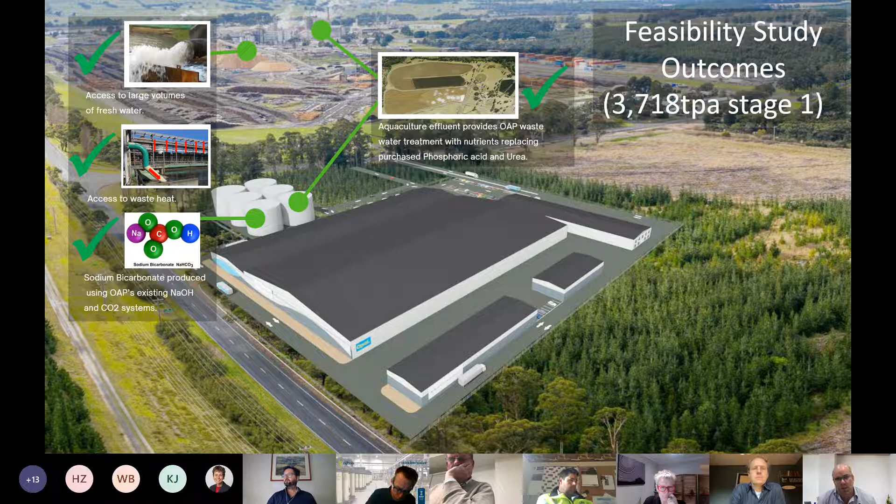Our plan for the future is to grow much bigger. With stage two, our production goes up to 11,000 tonnes a year. The plan behind that was to have the economies of scale to produce our own fish feed. There's a lot going on in the Netherlands with black soldier flies, and in Europe with wood waste used to produce single cell protein for salmon and tilapia food. There are opportunities for us locally to start producing our own fish food once we get the economies of scale.

However, as we grow bigger, the water requirement becomes a lot bigger, and the nutrient load for our effluent treatment facility becomes too much. So we would have to change our current processes, but the best way to remove those nutrients is so that we can then use the water to produce pulp and paper. The concept is we use the water to grow the fish first, then remove the nutrients so we can produce our pulp and paper.

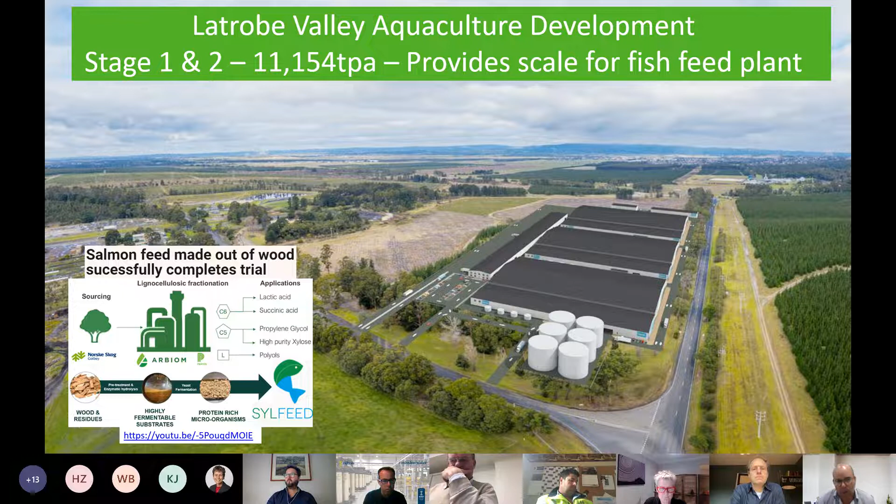So one of the ways this is currently being used in Australia, I'll just play this for you.

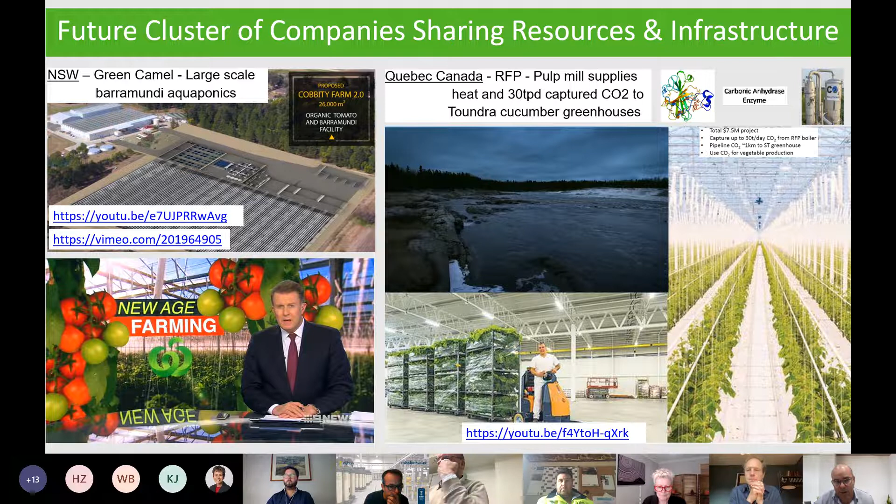However, we would need to follow that with a polishing stage, because the liquid effluent leaving the greenhouses would still be quite high in nutrients. This is also in Australia, in Queensland - large-scale industrial algae production aligned with aquaculture effluent. There's a huge opportunity in Australia to start producing more algae products.

I'm not going to go into that today, but our overall concept is about this: we have this large allocation of water at the moment that we just use to produce pulp and paper. In the future, we'll have our own manufacturing ecosystem where we grow our fish in the water first, then produce our vegetables or berries, then our algae products, and these processes clean up our water so we can then use it to produce pulp and paper. So we're essentially producing 4 products as opposed to currently just 1.

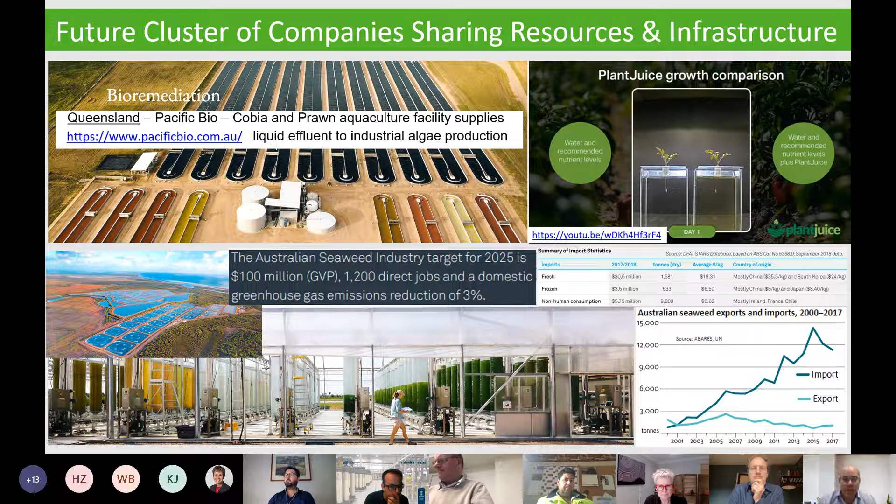Thank you. Under 8 minutes, I hope.

Greg, it's a really inspiring way of thinking and acting. It's brilliant how you combine the problem of the first process as the solution for the second, and the other way around. It's really clever. Thanks for this presentation.

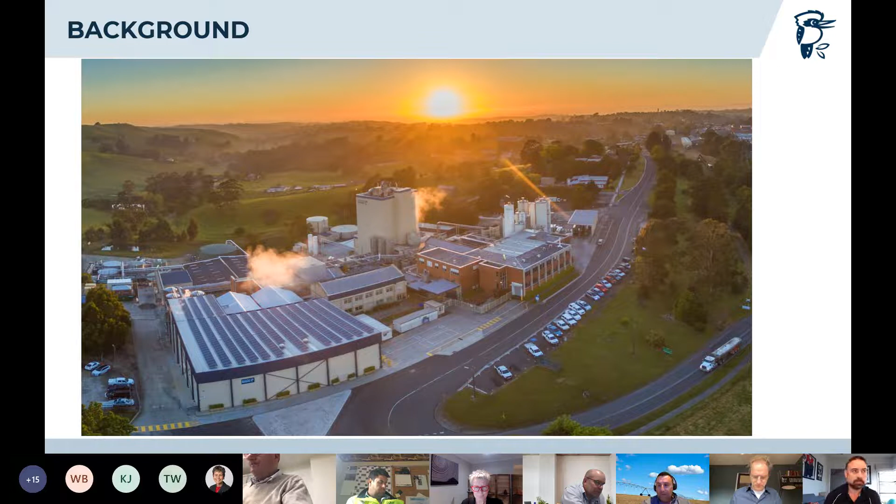There are two parts to our business. On the on-farm side, we don't actually run dairy farms ourselves, but we collect milk from about 200 milk supply partners. Typically about 30% of our supply partners have some form of decent irrigation on their property. All of our dairy farmers will have wash-down water from the dairies or from the yards where the cows come up, or from feed pads. It's very much a pasture-based system down here in Gippsland. All of that effluent runs into an effluent pond, which is necessary and a requirement of dairy farms here.

As I said, about 30% would irrigate that. Because we have a pretty high rainfall area in Gippsland, it's usually only in summer and autumn that irrigation would occur. Some farmers have enough dilution to irrigate directly, some will have to dilute. Particularly with fertilizer prices skyrocketing, they've tripled in the last month on the back of the Russia-Ukraine crisis, and no doubt the same in Holland and other parts of Europe, it's becoming quite an economical way of getting nutrients back onto the soil to help pasture growth. So that's pretty common with most of our dairy farmers.

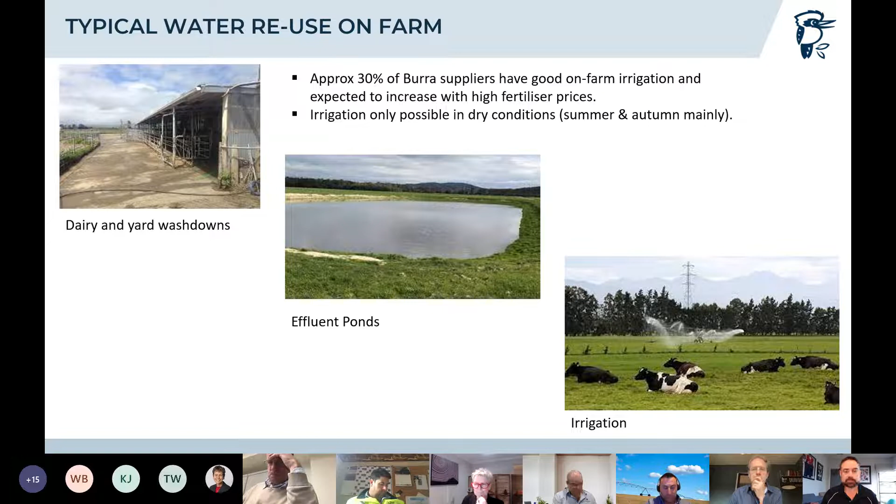Some of the outputs from all of the processes, largely our milk evaporators and dryer evaporators, and we've got a number of membrane plants across the site. We typically have milk condensate. We have cooling water from a lot of our pumps and motors. When we do our infant formula, which we call nutritionals, we need very high quality water, so we go through a cleansing system, taking the bad side of the membranes, if you like, for further treatment.

We generate liquid waste through our cleaning processes, and we end up with wastewater that's usually quite salty because it's been using cleaning chemicals, typically caustic. We do have a recovery system in place — we've reduced our consumption of caustic by around 70% through it. But we still end up with quite a large salty waste stream, which goes down to a municipal treatment facility. The rest of the outputs end up as inputs where we have an RO plant where we concentrate the water, and we use this as a reuse facility.

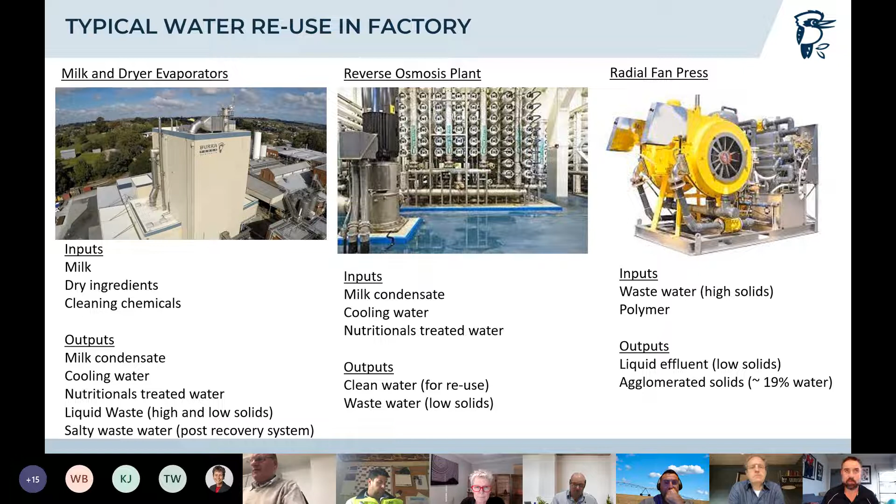Just to give you some numbers around that, we process between 700,000 and 1.5 million litres of milk a day, very seasonally dependent, based on the pasture system that we run for our dairying down in Gippsland here. We still purchase around about 1,000 megalitres a year of town water and recover about 800 megalitres.

We could invest in further filtration plant to do that. We just haven't found it economically viable to do so just yet, particularly now that we've got a larger guaranteed supply, because our inbound water, we call it town water, is linked now to a metropolitan system.

We produce around 30 tonnes a week of agglomerated solids, which goes off for that eventual composting. And our liquid effluent is somewhere in the order of 1 to 1.2 megalitres a day. So there's quite a lot of volume through that.

Some of the opportunities we're continuing to pursue, particularly as fertiliser prices are going up, include removing some of that organic matter and then being able to use the liquid effluent as a supplementary fertiliser. It's pretty high in phosphorus and potassium in particular, not a lot of nitrogen, which our dairy farmers would like. But the issue we have at the moment is there's still some organic matter in that liquid effluent, and of course we can't spread that without some degree of biodegradation.

Another option we've looked at regarding the agglomerated solids is to use a biodegradable polymer or something that will break down on farm and also remove the organic matter. Then we could actually spread that on farm as well to provide some further nutrients to aid pasture growth.

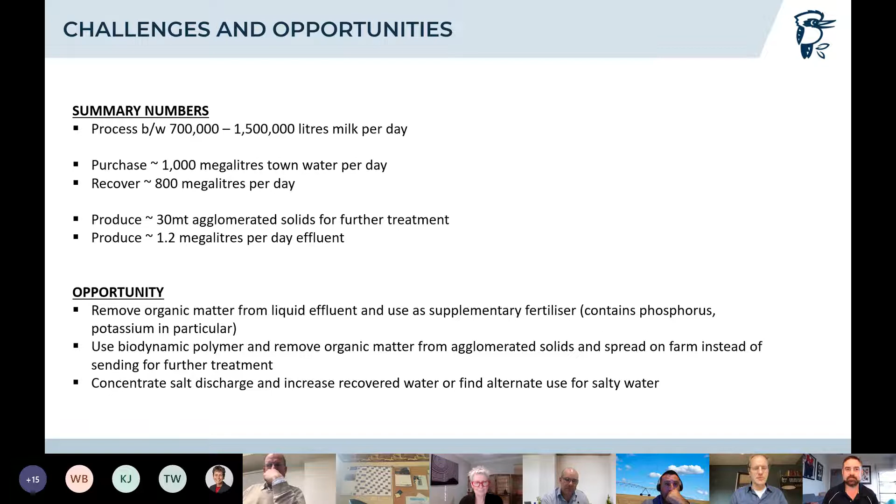Thanks, Stuart. Great presentation. I was preparing the question, what can we do for you? Because you have it so well organized already, but you left a few opportunities there on your last slide, so that's great. And I'm sure that the Dutch presenters will respond to these opportunities. The organic micropollutant removal is a topic in the Netherlands, definitely on wastewater treatment plant effluent, but also in other processes, and also the removal of salt and sodium. That's something that Willem will address. So I hope we can inspire you in the presentations to follow.

Nicola, do we have a presenter left from Australia now, or Agriculture Victoria? Yeah, I think that's the last presentation from Australia, right? Yes. Okie-doke. Well, then let's give the floor to Agriculture Victoria. Greg, how you going? I again have a couple of slides I'd like to talk to, if that's okay. Sure, I'll get them.

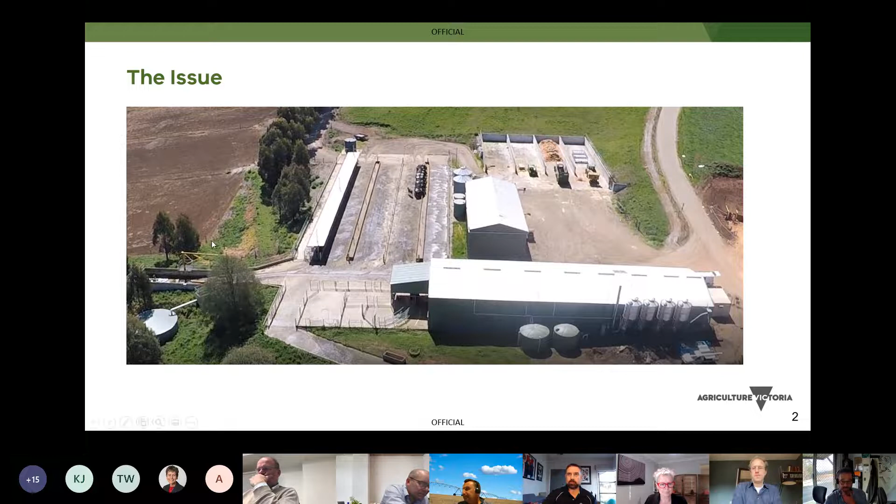I've been trying to work out how to resolve this issue. What if it was possible to develop an automated water diversion system based on water quality, whether that's turbidity or nitrogen content? This way I'd have the ability to redirect the water before it entered our pond system, based on the quality - so fresh water or surface runoff that was clean enough to fill our washdown tanks or even our clean water or rainwater reserves, and then overflow back to the waterways.

The second part would be slightly contaminated water - the first part of the rainfall contaminated with cow manure and effluent, or other parts such as silage stack runoff. Thirdly would be our standard type high effluent content water that we've built or designed the system to manage.

In conjunction with this, where this has become more of an issue is we're looking at trialling or designing a biodigester for a pasture-based dairy system. I think the main problem we're having with that design is being able to feed this digester a consistent, regular volume of effluent suitable for processing.

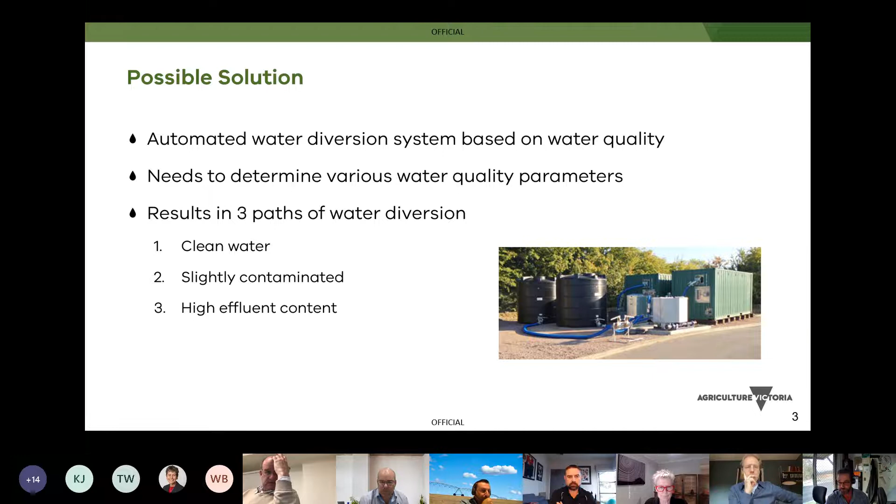Thank you for that, and I'd enjoy any input. Going on from what Stuart said, there would definitely be some options for co-digestion, I think, with your radial press digestate, and possibly increasing the benefits of operating a digester at the dairy here.

Thank you. Thanks Greg, thanks for your presentation. I think regarding this digestion, we have some companies in our association specifically working on digestion of organic material and producing biogas. We have the water companies today in the call, but we can also continue to explore how we can bring digestion technology to Australia as well.

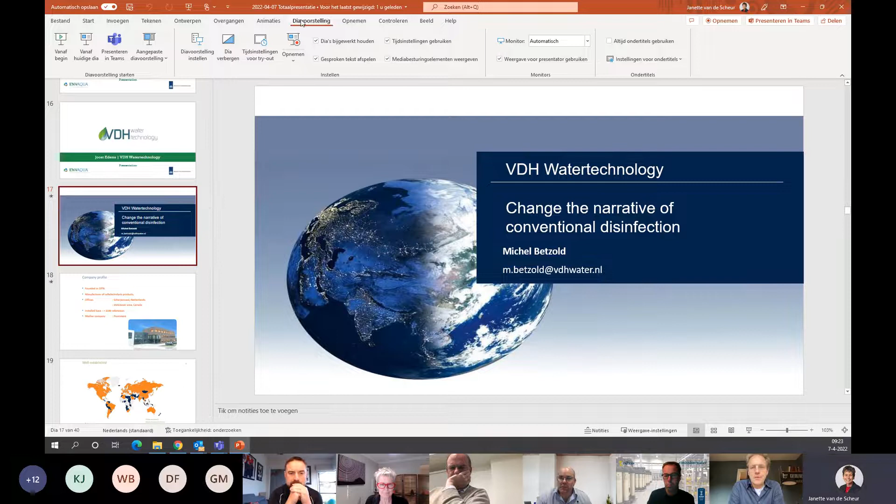I will, thank you for attending. My name is Michel Betzold, I'm from VDH Water Technology. I'm sorry, I don't know how the slides work, so the next one is okay.

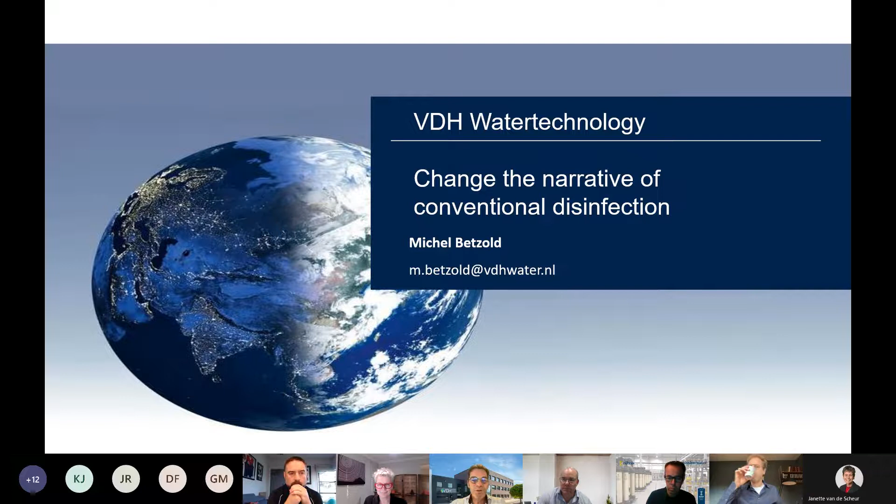Can you do the next one? Thank you, you can click one or two times again so we get the whole picture. I think that's easier in the short version. What we do is basically produce chlorine in the machine based on membrane technology.

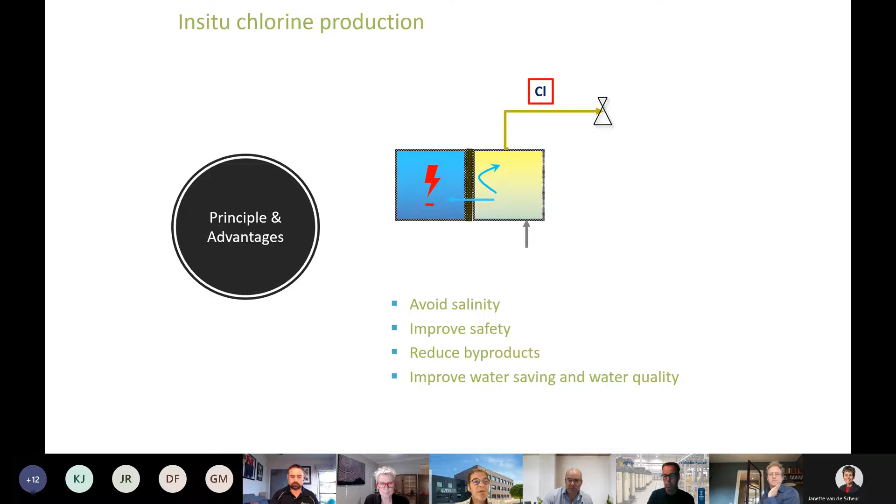A lot of our machines are supplied with membrane technology electrolyzers. To make it simple, we want to avoid salinity in the process water and improve safety. On the chemical side, we reduce byproducts in the process as well—mainly chloride, the Cl-, and chlorate, which is especially an issue at the moment in the food and beverage and agricultural sector. Maybe not in Australia, but if you're exporting from Australia to Europe it will become an issue. Chlorate is a hot topic at the moment. We can produce a special chlorine product where the chlorate level is very low, due to the process and supply chain, so chlorate won't build up too much in order to meet the limits within the European community. Next to that, we can also make improvements—it's a small contribution to water saving and water quality. Can you do the next one, please?

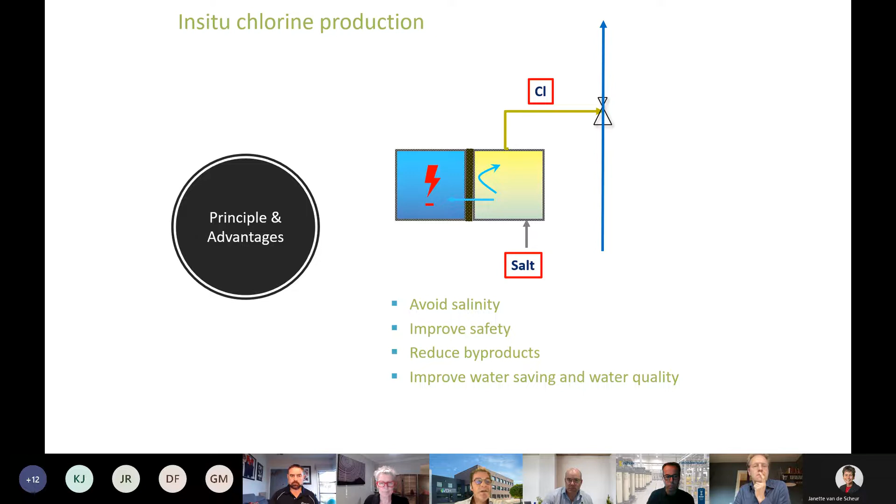Thank you. I got some examples. One is in the horticultural sector, circulating wash water.

We were facing an issue for one of our customers: spread of fusarium, and also the limited availability of fresh water. The crops themselves, in most cases, are very sensitive to changes and other particles in the water. What we can provide in this situation is a water intake reduction of 78%, which is important because everyone is suffering from water shortage in a lot of cases.

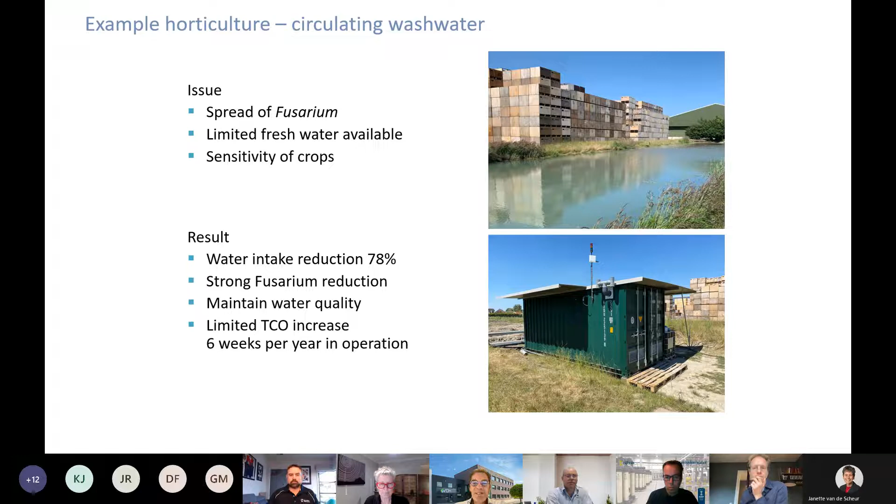Also a strong fusarium reduction, still maintaining the water quality, and the TCO increase is limited, but there's only 6 weeks a year of operation, and this is quite extraordinary.

All right, thank you. The dairy sector: we had a business case at Arla Foods in Holland. It's a specialty dairy company. They do a lot of changes a day in production, so they also do a lot of CIPs per day because of the specialty switches.

Therefore, they use a chemical from Ecolab, which is highly costly. But that's not the most important thing - it has to be heated up. Because a chlorine product with very low chlorate and chloride could be used instead, they didn't have to heat up. So they could save on gas, and that's a lot of money. Therefore, the business case for Arla was very interesting.

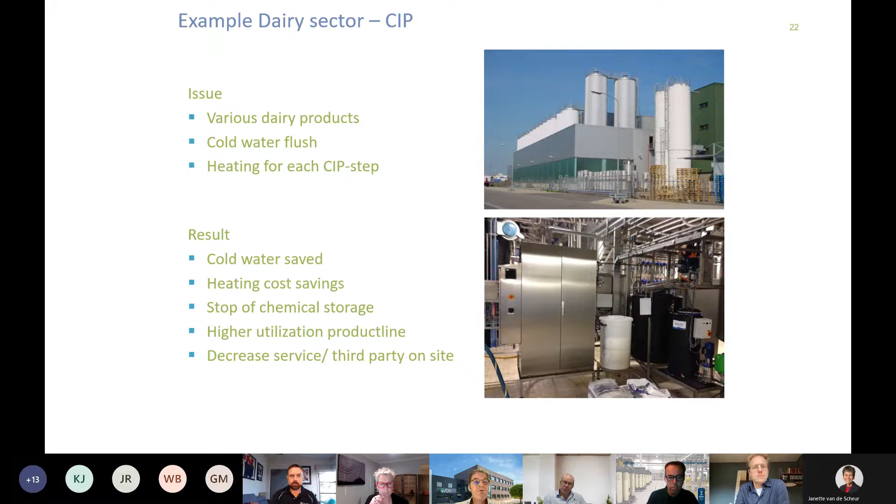Also, for each CIP, they didn't have to cool down the system, so they don't have waste of product which was heated up. It saves a lot of time, which increases the production capacity. And the chemical storage was less. The utilization of the product line, as I said, means you can produce more a day. And the service of third parties on site - they found it important to decrease the number of parties.

And we got an example of potable water. This is in the Czech Republic, where chlorate in potable water is a very important parameter, and this is why they always had to use chlorine gas as a disinfectant. But due to the safety risks and also the transportation of flasks of chlorine gas, they were trying to find another way.

Because we manufacture the electrolysis machines, we can make sure that the chlorine product coming out is on spec of the customer. This is why we are not doing rocket science - the only thing is we can adjust the machine in order to produce the chlorine product demanded or wished.

The result is that they had 4 machines in this facility - it's the Baak water company. They could have the same quality as chlorine gas, but out of an electrolyzer only using salt, and still have not too high operational costs a day.

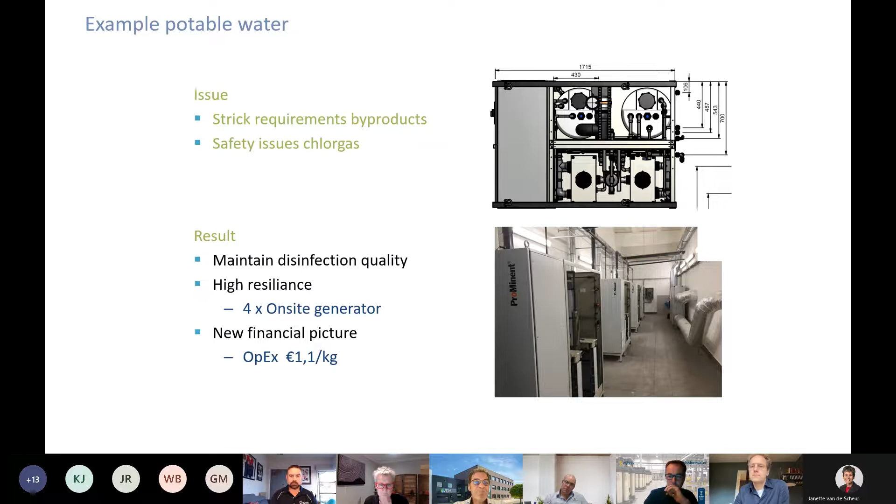Thank you. Well, talking about effluent and paper mills: in Holland we got 3 paper mills situated, owning their own wastewater company, more or less. It's a reuse plant - they are the 3 shareholders, and the water coming from the paper mills is reused, and the reuse is possible because of the water treatment of the effluent.

They had a chloride accumulation in the water treatment, and they want to reduce it, which was coming partially from the chlorine used - the commercial bleach - for disinfection. In this case, the disinfection is still done only out of an electrolyzer system, and the electrolyzer system is producing, in this case, also highly purified chlorine gas, and it is sucked into the process directly.

They had some other issues - they are using a lot of caustic for the membrane bioreactor. The caustic produced out of the machine is added to the caustic they are using, so they are purchasing less caustic. Also there's a CO2 stripper on site where the anolyte of the machine, which is the waste, could be used because it's highly acidic, instead of CO2. Well, not completely instead, but it's all about the resources and how to improve the footprint.

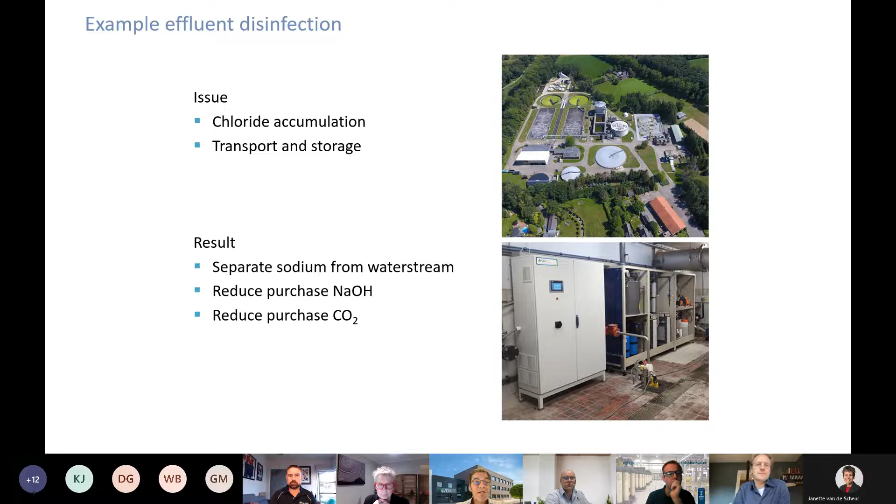Yeah, that's okay, I'm almost ready. And well, that's it. We got a lot of examples I can tell you about, but if you got a particular situation regarding disinfection, we can help you with that. Thank you for listening.

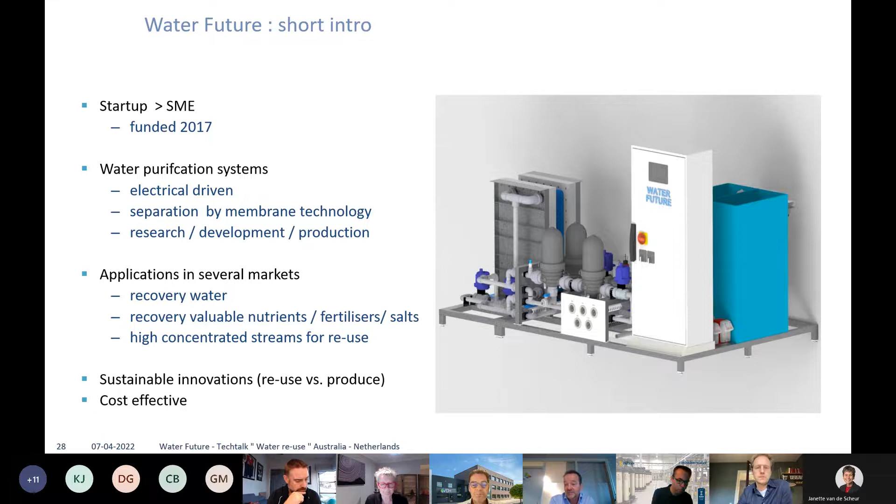What kind of applications do we have in several markets? It's focused on the recovery of water, the recovery of valuable nutrients, fertilizers, and salts, so we are different on our own - I'll explain that later. We are able to create high concentrated streams for reuse. For example, if you have fertilizers, you want a certain concentration, otherwise it's very difficult to use it again. We only look at sustainable innovations - that's our DNA. We look for reuse instead of decompose and produce, and we are aware that it needs to be cost effective. It should make sense.

What is our specialism? I would say electrostatic desalination, or electrodialysis - more or less the same thing. It's a kind of battery. We have no chemical side reactions, so it's more sustainable, more safe, and more cost effective. It's suitable for smaller applications, though we can also do bigger applications. For example, here you see a system able to operate a greenhouse of 5 hectares. So it's a small system, but it does the job.

The second innovation is ion selective desalination. We like to separate monovalent ions from multivalent ions, for example to get rid of the sodium - that's the main focus, getting rid of sodium and sometimes a bit of chloride, while keeping all the fertilizers inside. It's important to know we have dense membranes, so no organics pass through, also no pesticides or whatever. So you get a high concentrated waste or product.

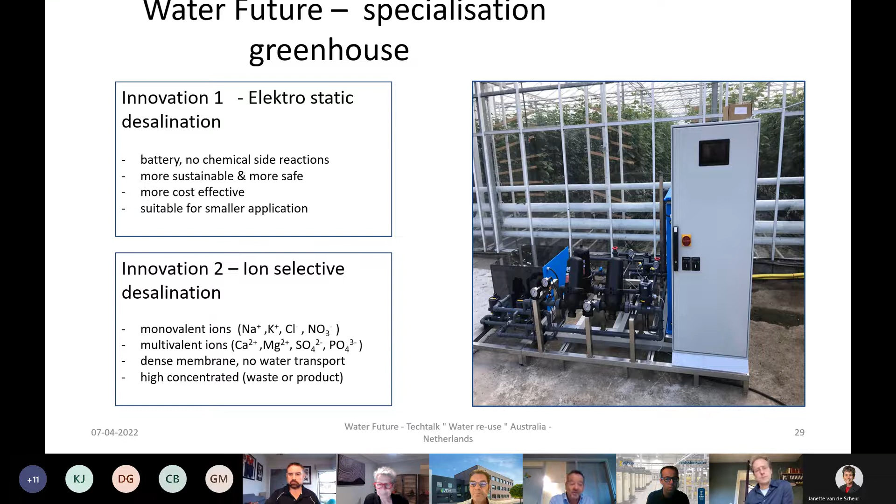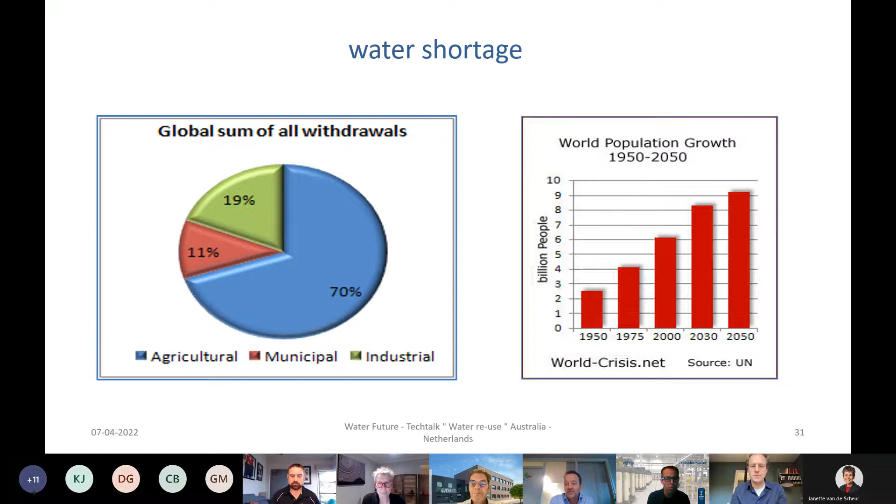Now about greenhouse food production, the most sustainable way - I'd like to guide you through this. If you look at the bigger picture, we have water shortage worldwide. Looking at water consumption of the 1% fresh water available, around 70% is used in agriculture. So if we really want to solve problems, we should make sure the agricultural part goes down. And looking at world population, it will increase, so we need to start acting.

Looking at the Dutch greenhouse, that might be an interesting concept. Some facts: the Netherlands is a small country, but we are the second biggest food exporter. We have double the crop yields compared to open ground. There's a lot of collaboration there - universities collaborating with companies, lots of initiatives. But the most important part is a 90% reduction in water usage, and that's really the game changer. It's particularly amazing because we're densely populated, and the number one exporter is the USA, but their surface area is 270 times bigger.

So let's look at the greenhouses in the Netherlands. This is a nice picture of the Netherlands - you see some cities, and a lot of white roofs. Even at the seaside, all these white roofs are greenhouses. So it's really urban farming, I would say, and you can imagine that goes quite well.

We produce well, but there are definitely some environmental problems. What's happening is the water is continuously reused - they have a substrate and are continuously recirculating, reusing the fertilizers continuously, and using pesticides. That goes well, but at a certain moment sodium increases because it's not taken up by the crops. Then they have to discard, and problems start. Pesticides are released and have to be first degraded, so that part is now cancelled by legislation.

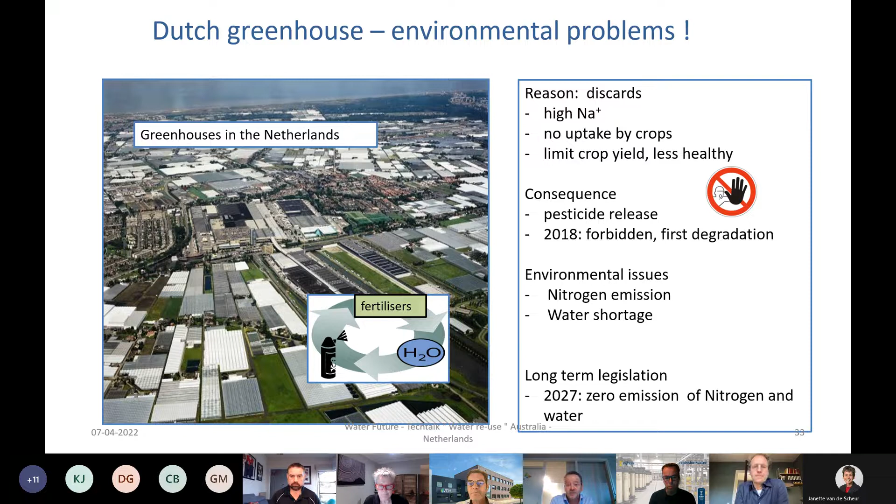So what are the issues there? The first problem is the nitrogen, the emission to the surface water. You get some blue-green algae, which is not good. And also our biodiversity is affected. If you look at the Netherlands, we have around 9,000 hectares of greenhouse, and we emit this to the surface water. So that's not good.

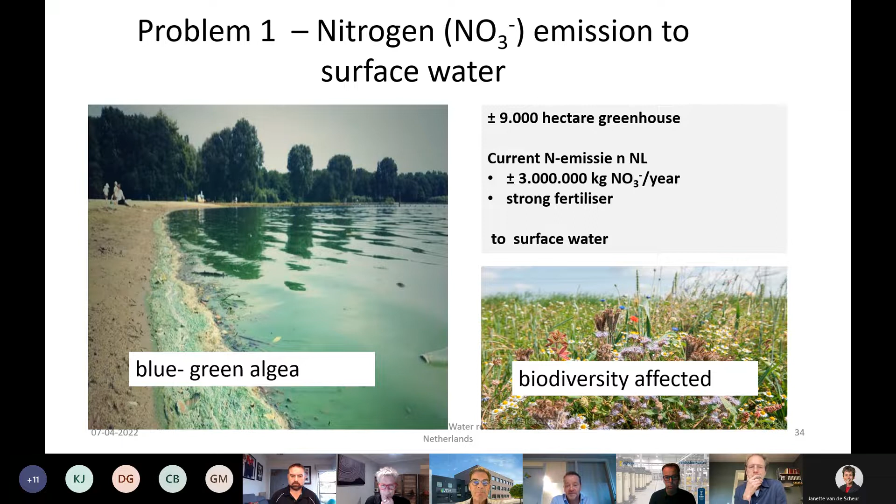So the second problem - maybe you say, well, if it goes to the sewer, then it's fine. But that's also not the case, because you have biological treatment. Nitrate is converted to nitrogen, and in this process 3% is converted to nitrous oxide, which is a 300 times stronger greenhouse gas. So that affects global warming.

And also it's a bit strange to have decomposition, nitrate decomposition. It's a linear economy - you start to produce and you're decomposing, and that's not what you like. You should recover it. It's also known that nitrate production is very energy intensive. So a circular solution is needed here.

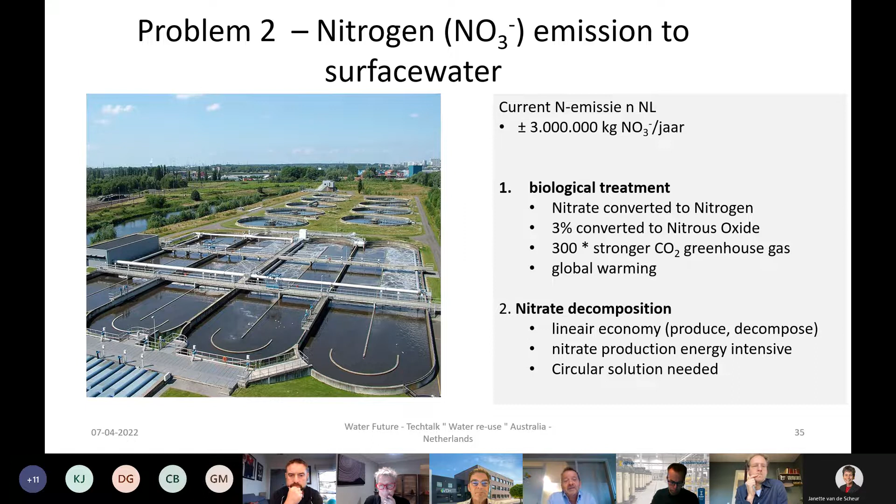So the last problem is the water availability for greenhouses. It sounds silly, but even in the Netherlands we are getting droughts. We have less rainwater, they can collect less rainwater, and sometimes they have shortages. They start to use reverse osmosis, but then they have brine issues. So now there's really a search for alternative water sources - it can be tap water, well water, but even effluent water is being tested.

I saw one in the presentations. We did an experiment in Belgium with effluent water to grow cucumbers, and that went very well - we could not see any difference. We pre-treated the water with the system, and then everything went well. Quite often these water sources cannot be used because sodium content is too high, so you cannot recirculate. It starts to build up too rapidly and you have to discard too fast.

So what is our solution? This is the current system - they have drain water and a recirculation tank. And if sodium is too high, they start to discharge. You want to get rid of sodium and chlorine, but there's potassium inside, nitrate, sulfate, phosphate, calcium, pesticides.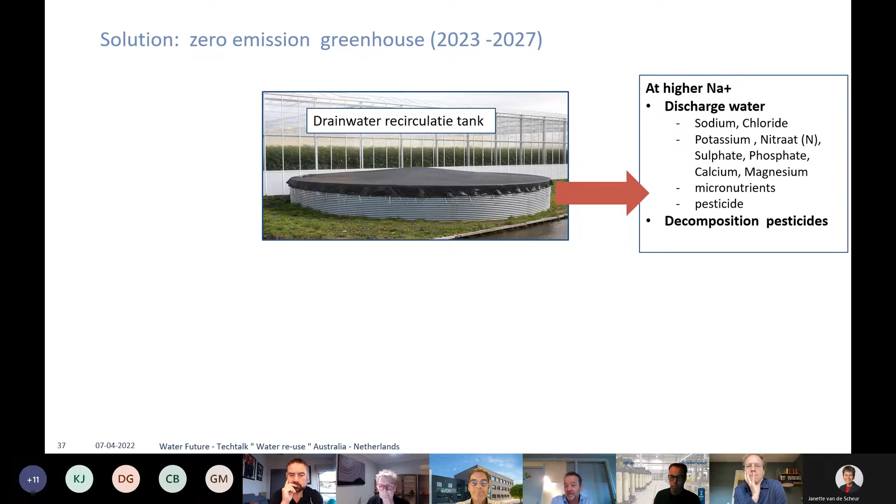This is common technology, and then the next part is our solution. What are we doing? We're treating at the recirculation tank - we can continuously remove the sodium, so we get it out. Unfortunately, potassium nitrate is also separated, but we have a nitrate recovery system with ion exchange resins, and then we regenerate with potassium chloride to get it back to the greenhouse again. At the end, we have only 5% water loss, so we are near zero emission of water and nutrients.

It looks maybe expensive - maybe back to the last slide, the first slide please. It's very profitable for the growers. They have control over the total process, the sodium numbers are not rising, they do not have to discard, they have better growing conditions, better feed conditions, and they have control of everything.

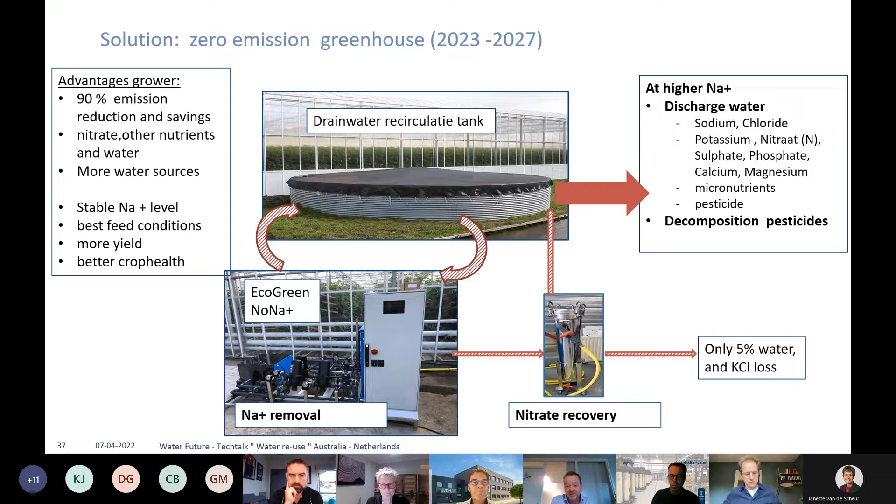So we hope that the first ones are running in the greenhouse on 12 hectares. It shows that it's working - still some work to be done. And then this ends up at my final sheet. Next, please.

I think in the Netherlands the needs are high, but maybe in Australia there might be as well, and looking at the presentation I see several opportunities. Research partners to adapt this technology in Australia - we are open for all collaboration styles. Everyone is welcome, I would say, who has recovery issues of salts, minerals, even volatile fatty acids or water.

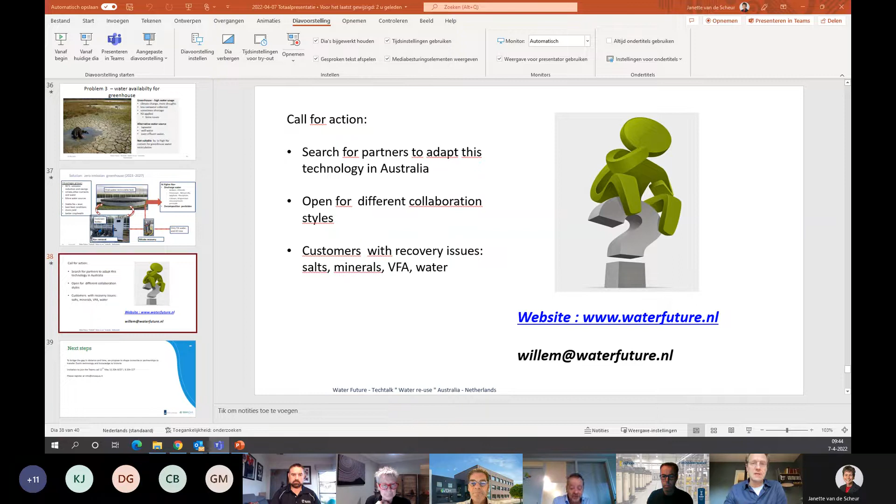That's it. Super, Willem, thank you very much. And a great invitation - so in fact you have a solution on one end, and on the other end you have an invitation for tech companies to help you out in delivering the technology in Australia. So this may be an unexpected invitation for anyone on this call, or who may know tech providers who'd like to take your technology from the Netherlands and start delivering it in Australia.

Please have a look at the chat. Stuart is asking what you are doing with the sodium after the removal. So where does it stay? I assume in the 5% water that you discharge, but please give some answers to Stuart on how you see your vision, because you are, of course, then creating a brine. So what is your vision there on what should we do with the brine then?

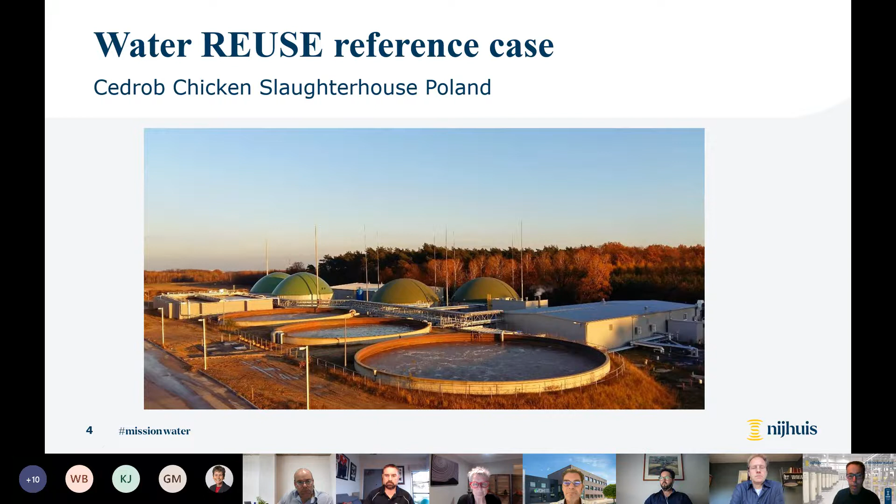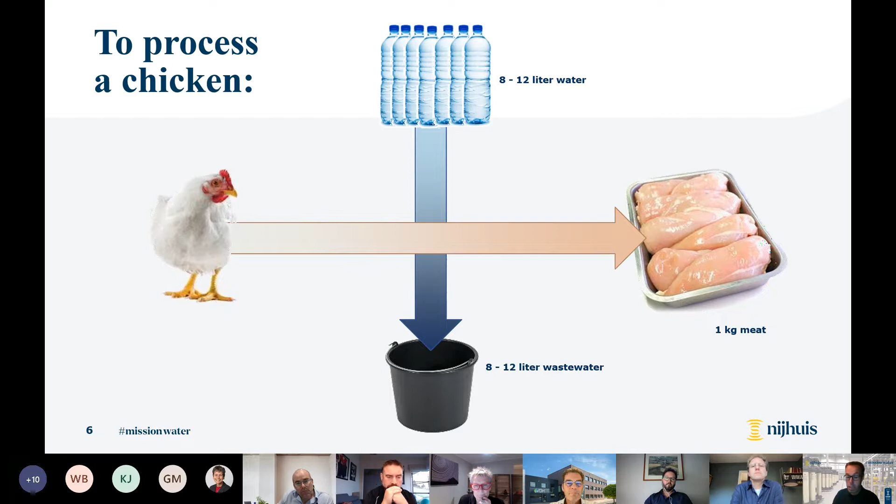This first reference is a project in Poland, a large slaughterhouse capacity, one of the biggest chicken processing in Europe. For context, to process a chicken into meat you require roughly 10 liters of water for every kilogram of meat, which on an industrial scale, where you have 250,000 birds on the production line, requires more than 3,000 cubic meters per day to produce all your fresh meat. But on the other hand side, you're also creating 3,000 cubic meters of wastewater.

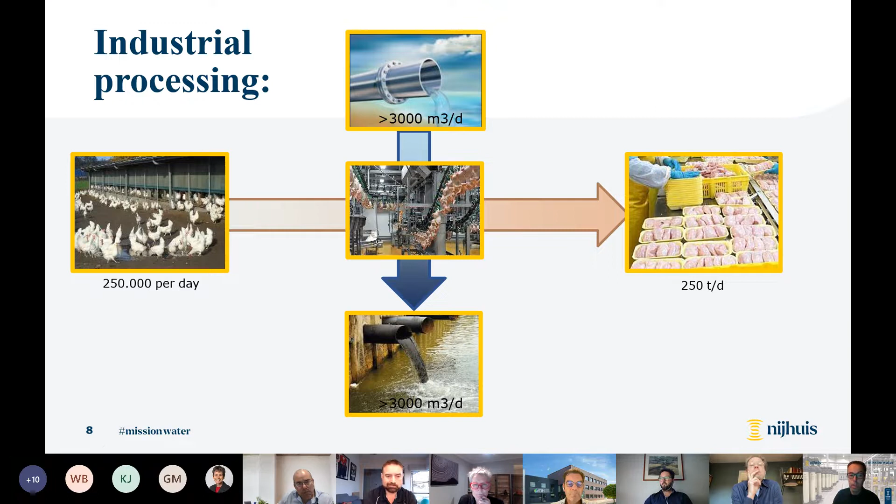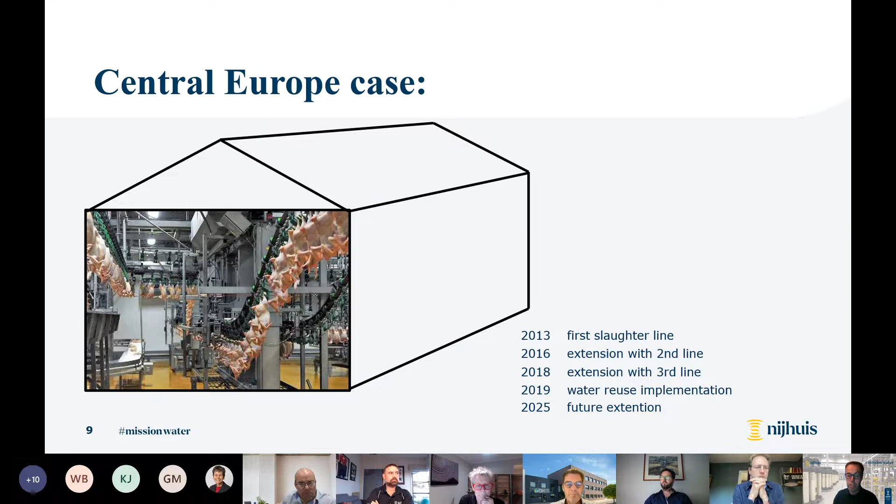With this client in Poland, we have been working already for 10 years, and they've been developing different processing sites of slaughter lines on this site. They currently have 3 slaughter lines in production and rendering facility with reuse. As the site developed, they have their own boreholes to get the fresh water for the production line. We realized for them the primary treatment and biological treatment to have safe disposal to the river in 2013 on the first line.

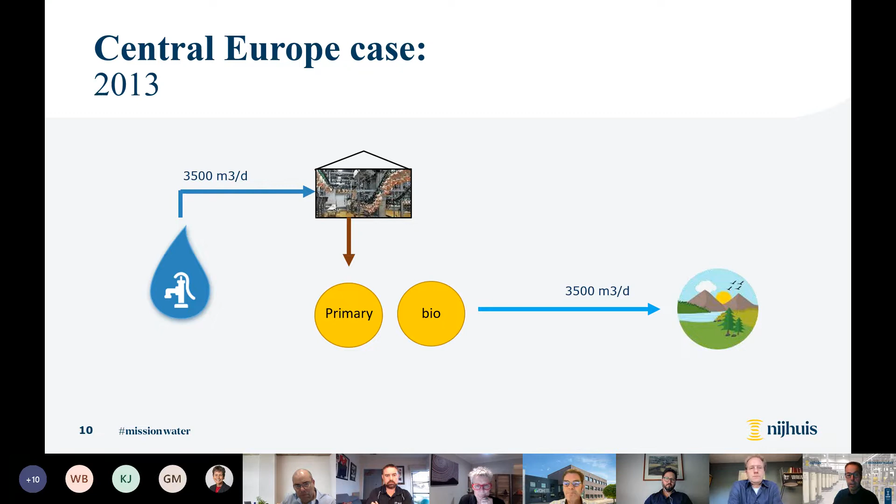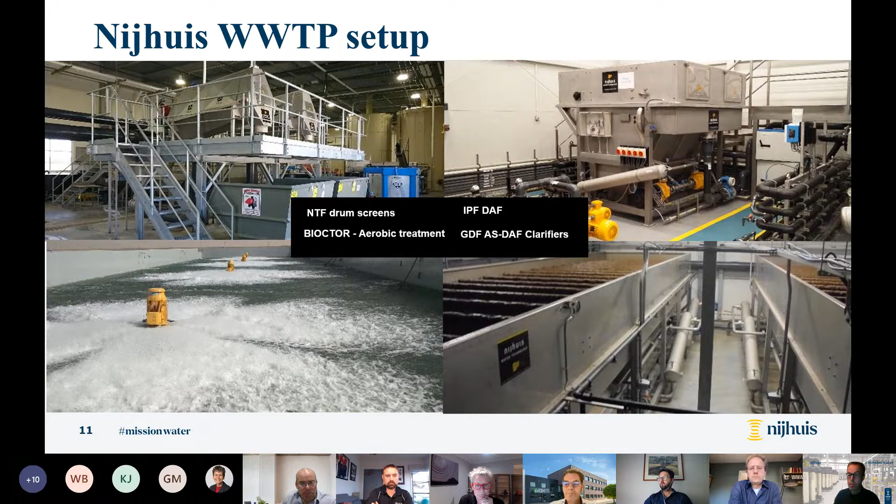It's just relatively straightforward technologies that we produce in-house and deliver: screening for large particles, feathers, bones, flotation units for fats, oil and grease, aeration ponds for biological stabilization, and clarifying technologies based on, in this case, sludge clarification, with flotation units to get finally safe disposal to the river.

And I thought it was interesting for you guys in Australia, we still suffer winter here. Last week we had a lot of snow in several countries here. We hope the spring is coming soon. But safe disposal to river, that's also here a topic in Europe.

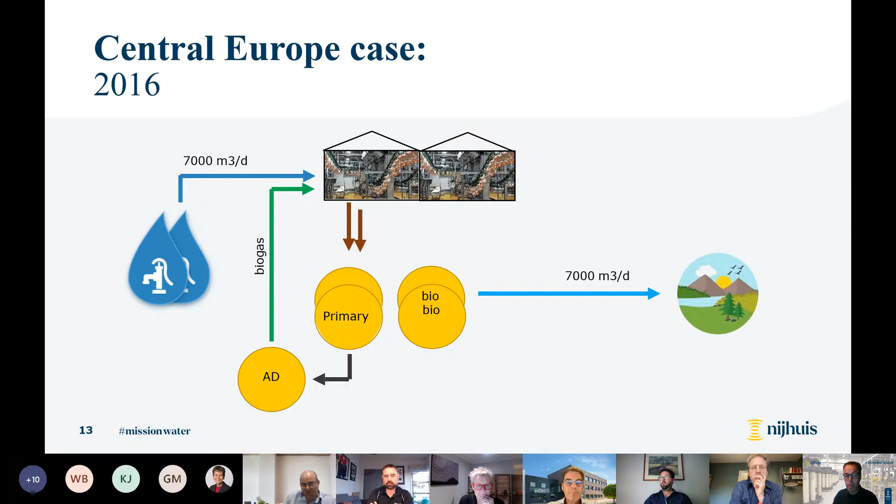With expansion, second expansion in 2016, more well water, more expansion of the wastewater treatment plant. In addition, biogas utilization, biogas production from the waste streams. In 2018, the third slaughter line with additional packages. So all in all, just make 3 times all the infrastructure. That was the strategy those days.

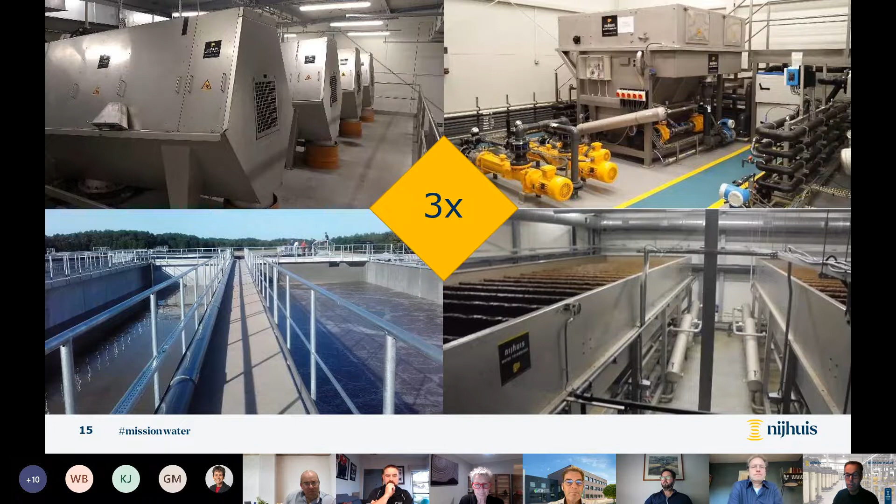And a glance of the biogas production by sludge digestion, and also the waste streams from the primary treatment, fats, oil and grease, to make biogas for the internal heat and energy production.

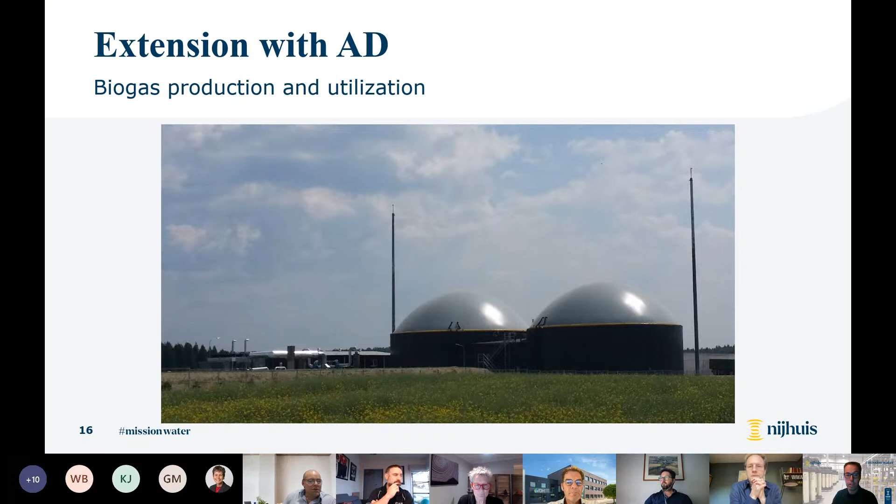As you see here on the site development on the north, it was started with an open field. Slaughter lines developed on the north side. You see first line, second line, third line on the north side, and at the bottom side you see the wastewater treatment plant developing from a few single tanks to a lot of tanks. But also what you can see from this bird eye view is that the soil conditions, just by simple bird eye view pictures, you see that it's more sandy.

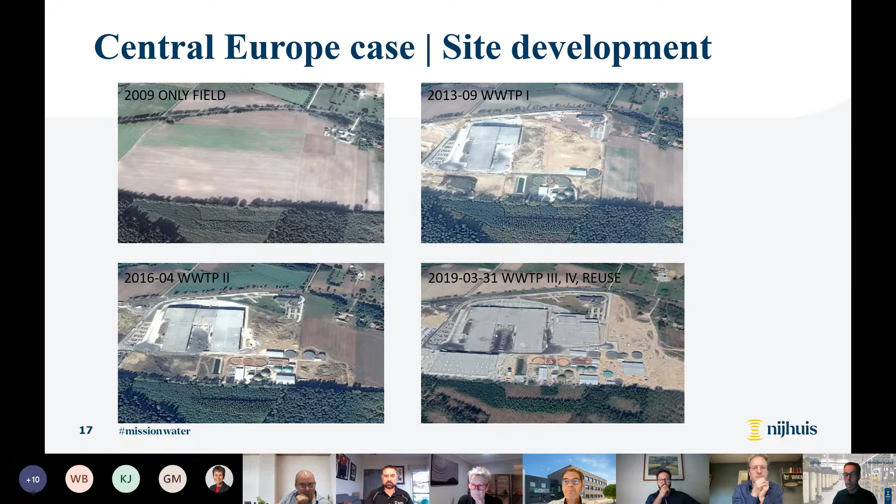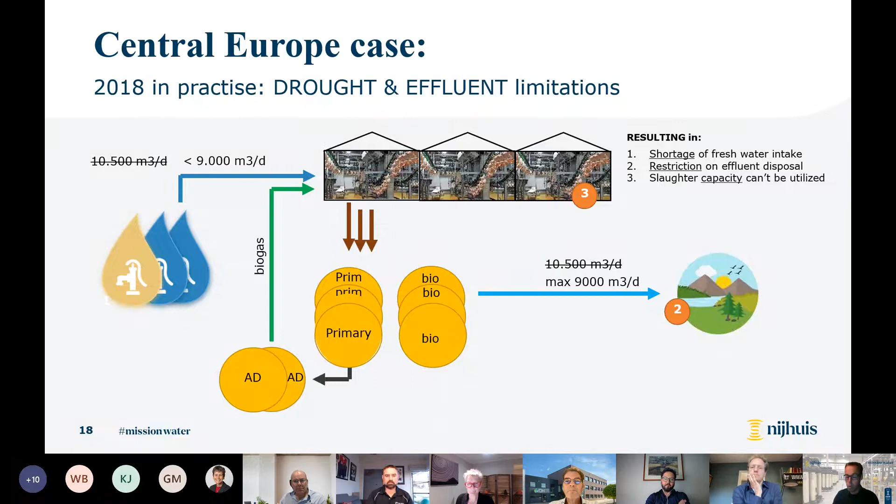The climate has an impact here on this side of Europe as well. This is Central Europe: Poland, Western Germany, Eastern Germany, Romania. In this case, we really have an unbalanced rainfall versus the evaporation. So also this client was suffering problems with the wells, even though the wells were not producing sufficient amount of water. On the back end side, because of the climate change and the drought, the impact of the slaughterhouse on the river was so big that even the local authorities were giving a limit on the amount of water that could be disposed back to the river, even though it was good quality. So limitations were given. All in all, the installed slaughterhouse capacity was not capable of running because there was simply no water. Water was the limiting factor.

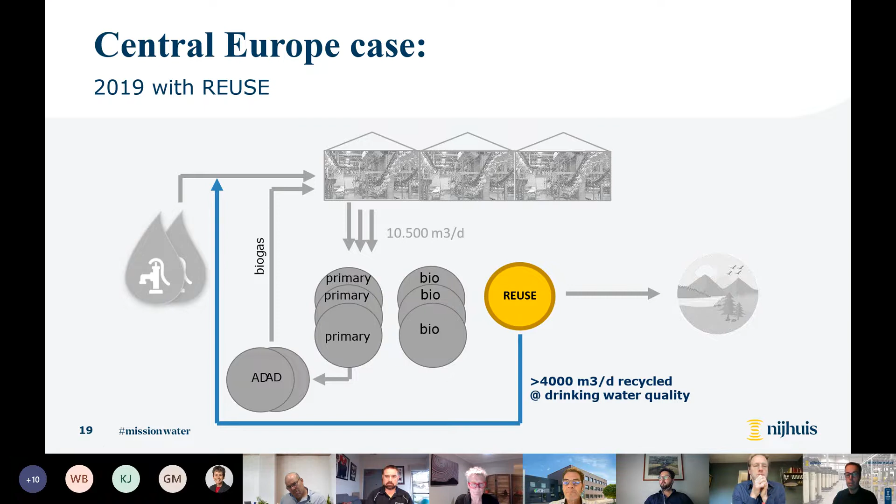We developed with them together a master plan. So beyond wastewater treatment, also recycling water from disposal into the river back into the front end treatment, but with the main purpose that it should be drinking water quality. They didn't want to have a differentiation between boreholes or reused water for different classes.

No, drinking water quality. So to go in that direction, we had an extensive pilot trial period to prove to the local authorities, local drinking water authorities, that we can produce drinking water standards, with all the certification and all the performances.

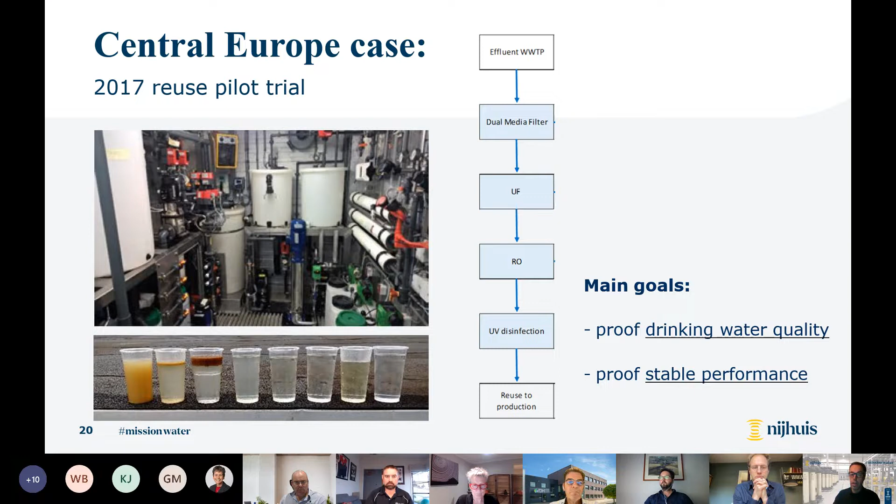And on the other hand, for the processing side, for the meat processing, it's a stable performance because it's a critical source. After the pilot, the system is designed for a total of 8,000 cubic meters per day of water reuse to substitute the boreholes. 4,000 cubic meters, so 50% of it, is installed now, supporting the existing plant, and the client is considering further growth of additional slaughter lines, and then they can utilize the total building.

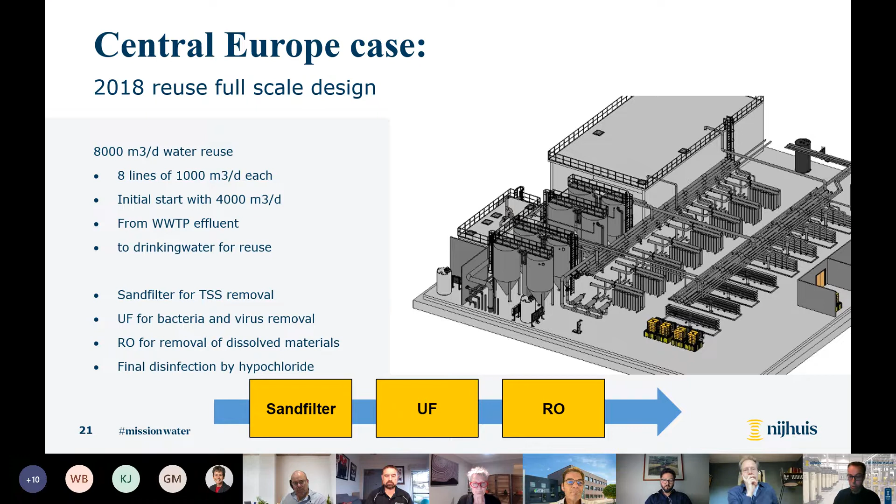It's a build-up of relatively traditional sand filter, ultrafiltration, reverse osmosis, but the challenge here is the interaction between an industrial wastewater treatment plant, with all the different variations in waste you can expect, and also rendering is connected to the wastewater treatment plant. On the other hand, you produce drinking water, real drinking water, which is certified. So all these belts and braces had to be applied.

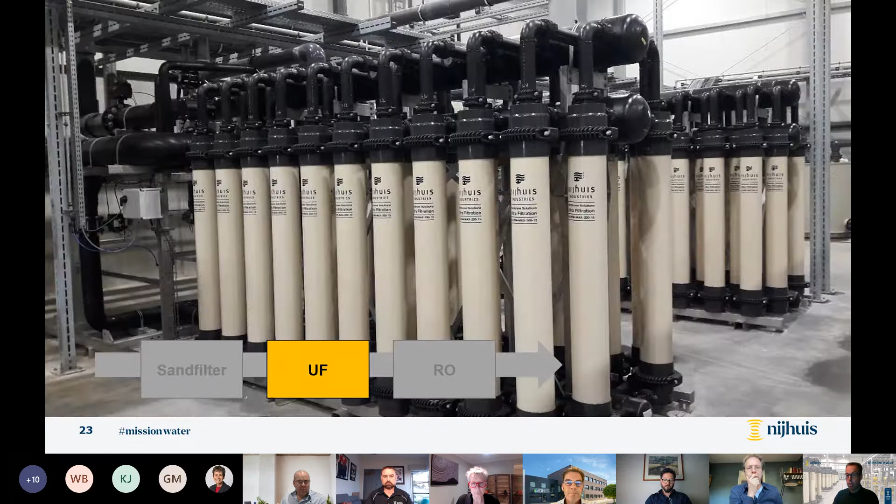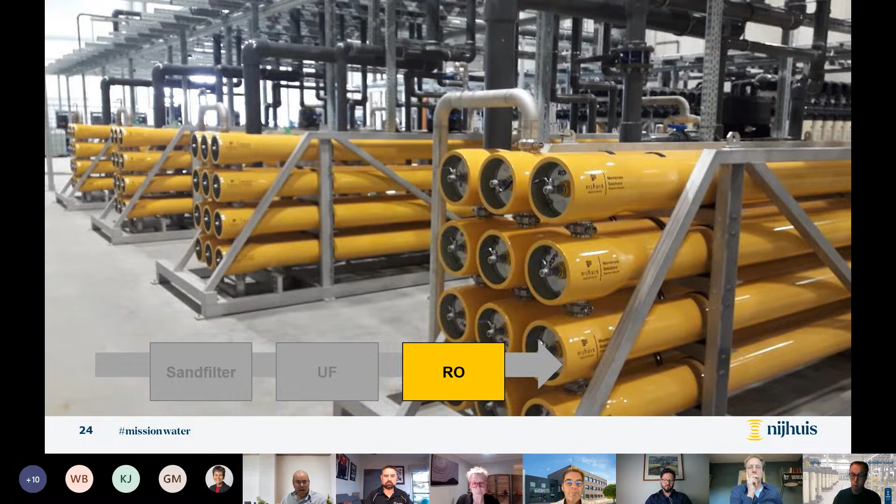You see a few pictures: sand filters to have extra belts and braces prior to ultrafiltration for bacteria and virus removal, and 4 banks of reverse osmosis to remove all the dissolved matter up and beyond drinking water quality. After this, the water is disinfected and then blended with the borehole water, and as a mix it goes into the facility.

So nowadays, on average, more than 3,000 cubic meters a day are recycled, a good balance, and the client is capable by this to think about future expansion, even though without further impact to nature.

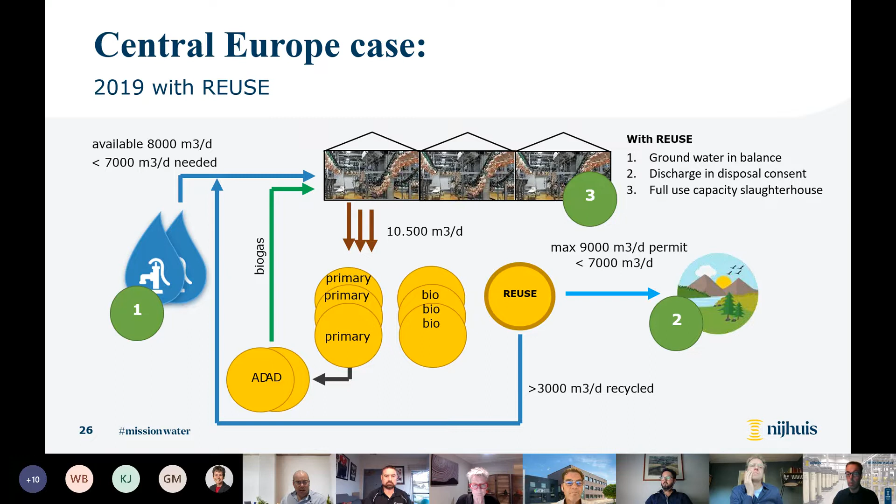Other topic I'd like to highlight is urban farming. So urban farming is something which is developing and is rapidly developing. And we have to do this, because if you purely look to the 2050 outlook, we will have 10 billion people, and from this 10 billion people, 70% will be living in cities, large cities. So everyone on this world will, within 30 years' time, live in big cities.

If you imagine that, in combination with climate risk - drought, flood - and the resulting food scarcity, how do we survive? We know this is coming. How do we survive? Can we learn and adapt from other areas?

And here I'm starting to go into the agro industry that we do already today. We see that universities, like Wageningen University, and also probably in Australia and different countries, are developing technologies with satellites and smart sensoring that give a good understanding of your fields and how your crop behaves, and which part of your field requires specific fertilization - precision fertilization - and also specific irrigation.

So this is already developed on the agro industry side. On the other hand, as a reference, we also develop technologies where we can recover the nutrients from waste streams from manure digestions, co-digestions. Rather than just have a blend of digestate - a blend of water, nutrients, organics - which you can use for irrigation and fertilization, we've developed technologies and references where you separate all these valuable streams: phosphate streams, nitrogen streams, potassium streams, and water, which you can really use for precision fertilization and precision irrigation.

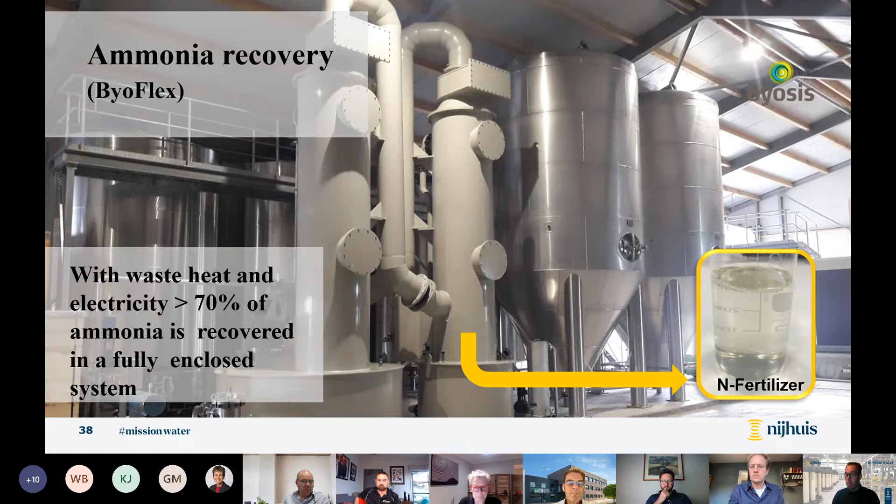An example technology: ammonia recovery. By stripping technologies, you recover the ammonia from the digestate into an ammonium sulfate or ammonium nitrate fertilizer, a liquid fertilizer. Another technology that can be applied is membrane technology.

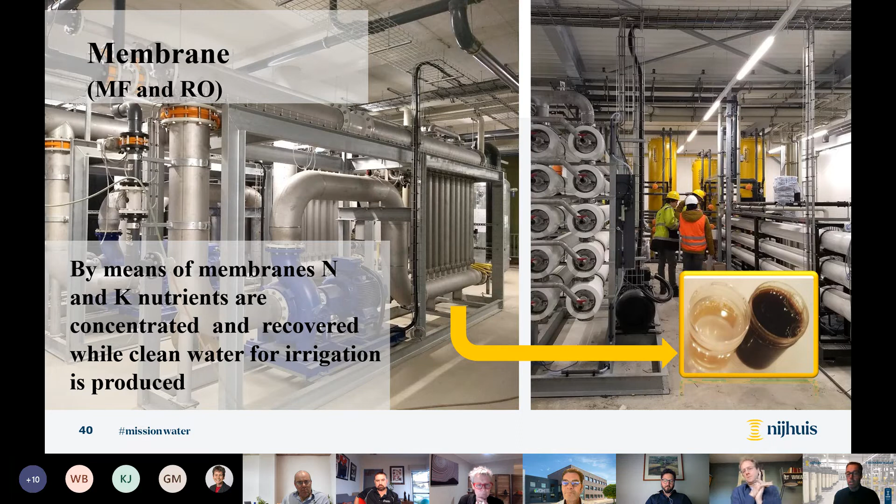So with a series of membranes, you can concentrate all the nutrients into the brine liquor you see here at the back end. It is RO brine, but it's full and rich in nitrogen, potassium, and any residual phosphorus. So with these technologies, you produce liquid fertilizers that can be applied alongside the development of precision fertilization.

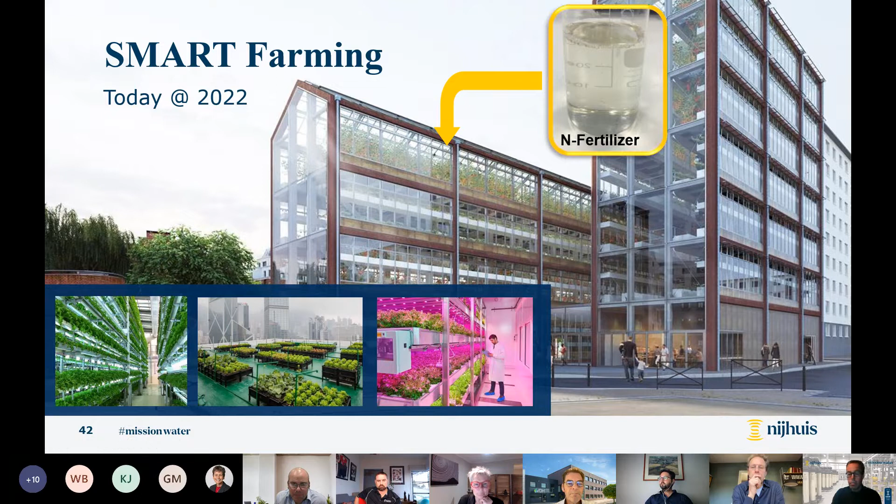Also, what is happening is city farming — on glass towers in cities. And guess what? They don't need digestate, they don't need manure, they need the concentrated nutrients as this product. So this is already happening today in many big cities, where food is produced inside the cities.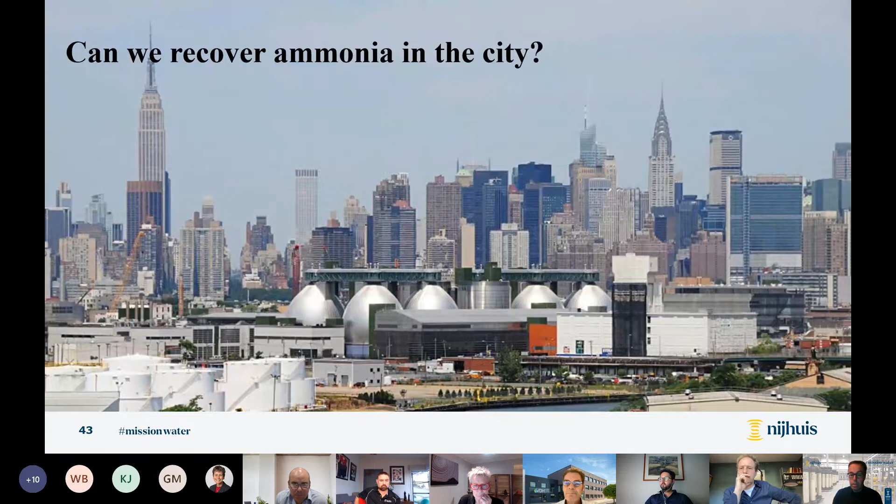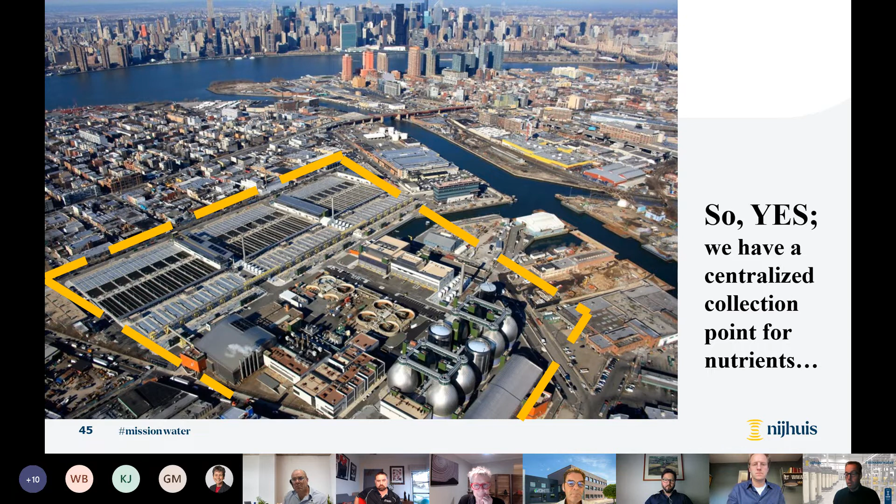So can we also recover ammonia from cities? This is the skyline of New York, Manhattan. Guess what — this is the sewage treatment works of New York. It's really close. We already concentrate all the wastewater with the nutrients from ourselves in a centralized treatment works. But what we do currently today, large aeration ponds, we blow all these valuable products away. So all the nutrients — of course we convert as sustainably as possible, but still we risk a lot of emissions of nitrogen, laughing gas, NOx, with this treatment works, and we just blow it away. We bring it back into the air.

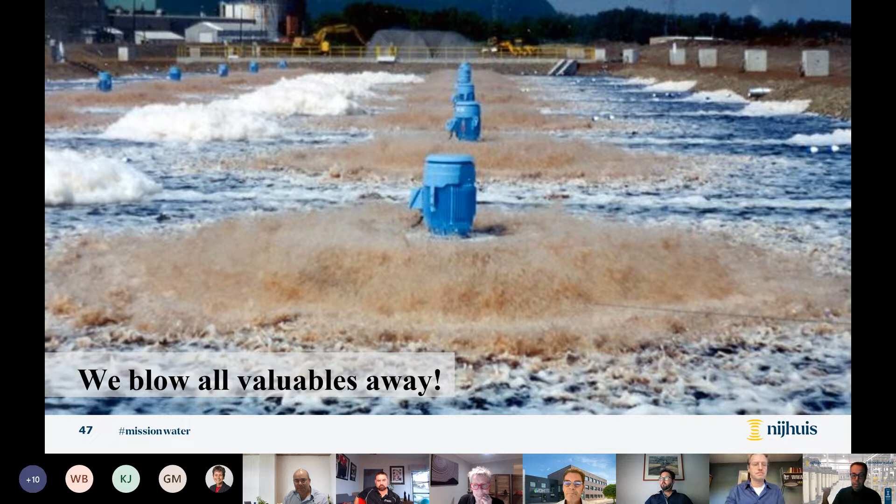So can't we apply these technologies that are already developed for the agro industry — can't we apply this already in the cities? Just an example: yes, we have the first reference already in Europe. This is a site in Germany where our sister company in the Saur group, Byosis, already developed the ammonia recovery in sewage treatment works, where the domestic sewage treatment works invested in ammonia recovery on the liquor stream, and the local farmers take the ammonium sulfate and bring it for field irrigation in the spring. So already here is an example where you bridge between domestic wastewater treatment and agro industry to reuse your field.

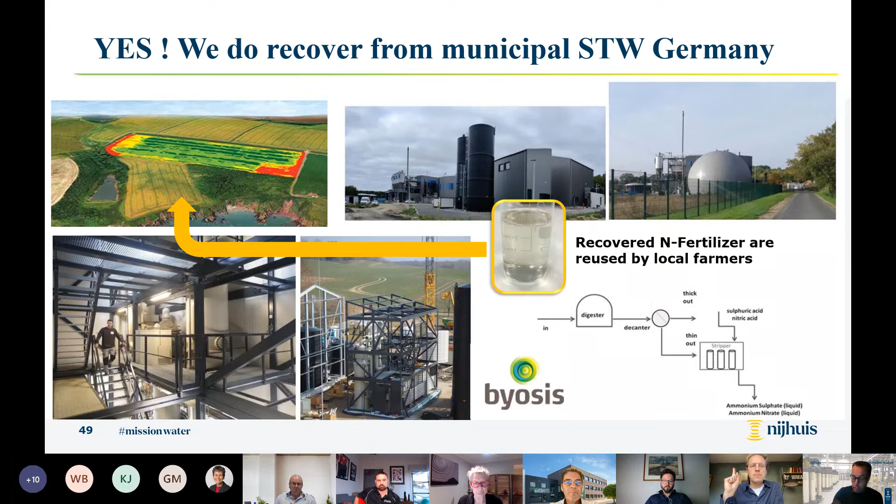And this maybe ties in on what Simon was highlighting — for example, where the effluent from the sewage treatment works is salt, and part of that salt is probably also the nitrogen. So if we remove the nitrogen at the sewage treatment works on one hand, we can reduce the salt content in your main aquifers, have a fertilizer on one hand, and have more water on spec, which you can use for irrigation purposes. That's one of the things I'd like to tie in later on that topic.

So we can create a resilient urban living. We are working on this, we are part of this development. So yeah, I'd like to team up with opportunities in the UK, or in Australia.